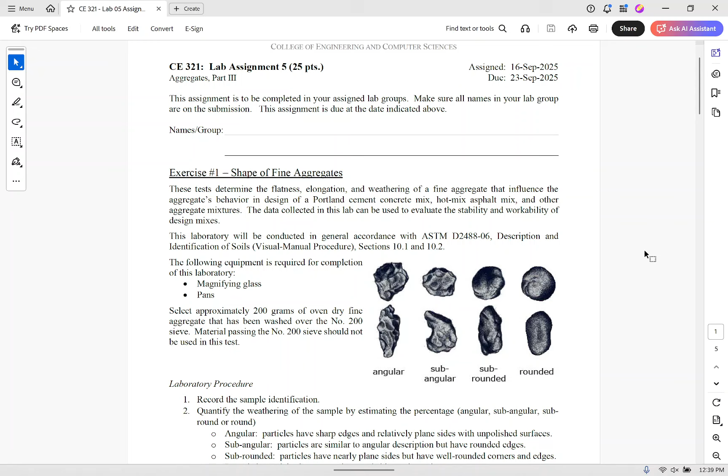Today's lab, we're going to be doing 2 things, and then we'll get into Portland cement and admixtures. One of them is the shape of fine aggregate. If you remember the lab where we had the pile of gravel and had to classify how many were angular, subangular, subrounded, rounded, this is the number of particles that are flat, round, etc. We're doing this for sand, okay?

That's not possible for sand, like, it's not possible to start counting them up. So what you're going to do for each sample is say, for this sample, 20% of it's angular, 30% of it is rounded, 15% of it is subangular, etc. And you're going to do that through visual classification. I'm saying this now because I don't want the class to sit there and try to count every little particle of sand. Please don't do that. You will be here forever. It will make a long lab. Don't do that. This is just a visual classification on the state of the sample that's been given.

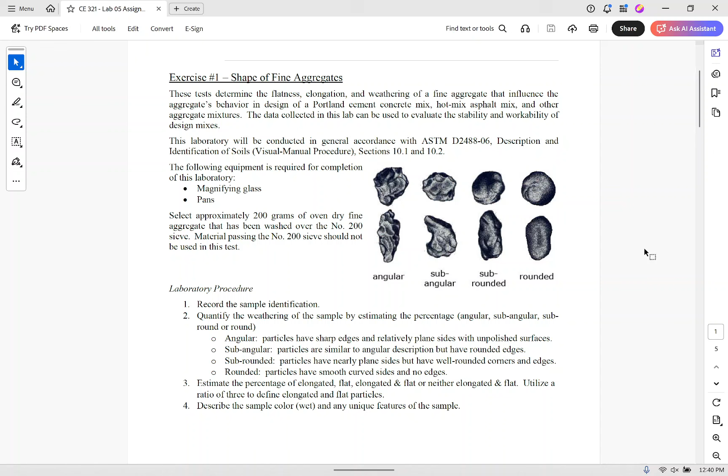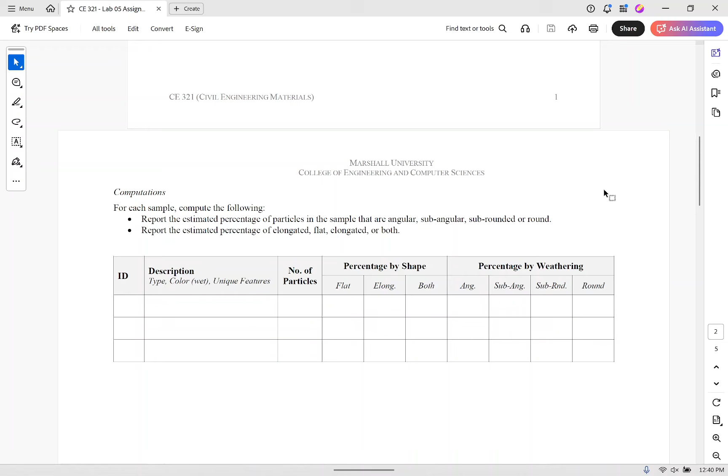We've got 3 samples ready for you for visual classification, not 5. And if I'm correct, I believe one of those samples is going to be somewhat unique. I'm going to keep quiet as to what that is, but I think you'll get a kick out of it as to what the sample actually is. It depends on if Patrick selected that one or not. We talked about it. I think I'll let him make up his mind on that.

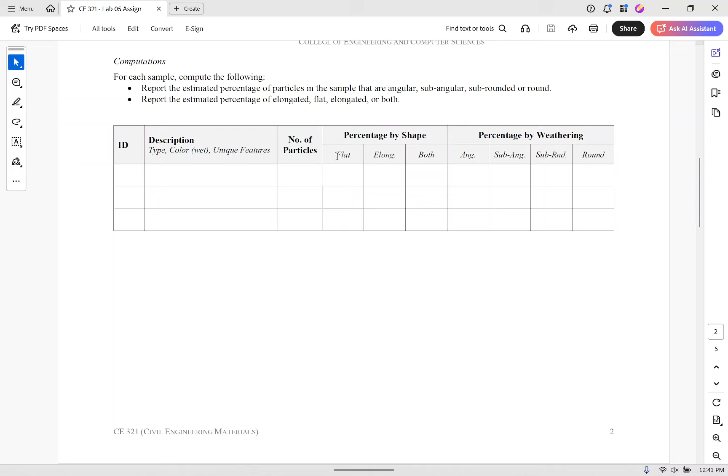Okay, so there's 2 exercises today. One of them is the shape of fine aggregate, which is this. The other is absorption, okay? So if you remember, how does an absorption lab work? Let's talk about the absorption lab that we did for gravel, okay?

For gravel, what we did is we found the moisture content for the gravel at saturated surface dry conditions, right? Now, saturated surface dry conditions are when the surface is dry, but all of the pores are filled with water, right? Is that right? That's what saturated surface dry is. And then we take the weight at the saturated surface dry condition, we take the weight once it's been oven dried, and then we can get the weight of the water over the weight of the solids, and that's our absorption, right? So that's exactly what we're doing here.

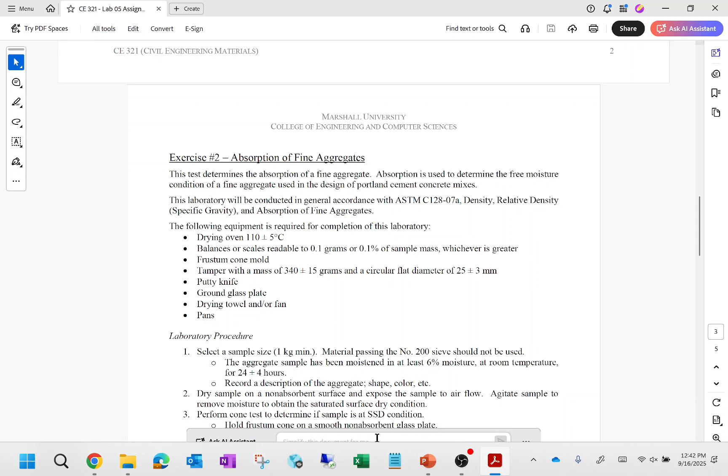The difference is, how do you identify when sand is saturated surface dry? It's a little bit easier for gravel because you can see the surface characteristics. You can't really see the surface characteristics for sand, okay? So the way we're going to do that is we're going to follow a particular ASTM standard involving what's called a cone test, okay? Now I'm going to show you real quickly what that is. Let me pause this.

Okay, so today let's talk about safety real quick. I don't really think there's anything worth noting that we haven't already noted before in another lab, in terms of, like, there's sand, so there's particles in the air, so be careful if you're handling sand with your safety glasses and all that. We don't have anything particularly heavy in this lab.

One thing I will mention is that one of the surfaces we'll use, the non-absorbent surface, is a sort of a pane of glass. It's about yay thick, so just be a little bit careful with that. But other than that, I think it should be a fairly straightforward lab in terms of safety and whatnot.

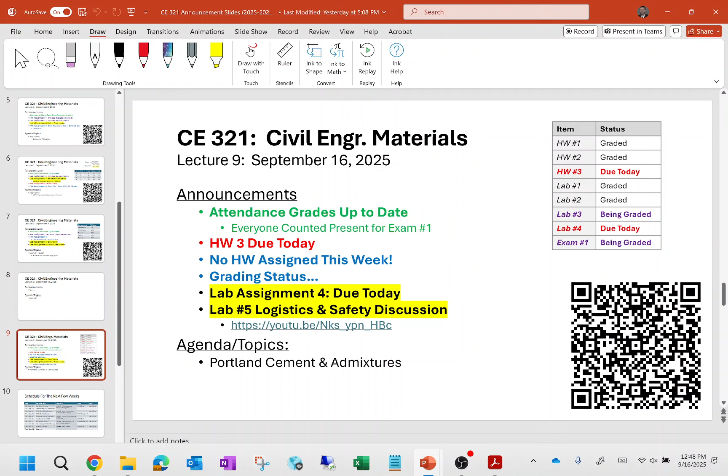Okay, sound good? Okay, so this week what we're going to do is talk about cement, cement and admixtures. So I want to talk about the properties of cement, how to produce cement, some of the reactions. I might touch a little bit on the admixtures, but I'm probably going to try and spend most of my admixture discussion on Thursday, so we can start to ease into Portland cement concrete on Thursday.

Okay, so the first thing I want clear in this room is that cement is not concrete. If you're walking down the road and you're walking on the sidewalk and you trip and fall, you don't hit the cement, you hit the concrete. Cement is an ingredient in concrete. Concrete is a mixture of primarily 4 quantities - well, 3 if you consider it just aggregate - but coarse aggregate, fine aggregate, cement, and water. So aggregate is an ingredient in concrete, water is an ingredient in concrete, cement is an ingredient in concrete. Cement has been in existence for about 200 years.

It was patented in the 1820s, and the name Portland cement comes from the primary ingredient used to first manufacture it, which was limestone that came off the cliffs of the Isle of Portland in England.

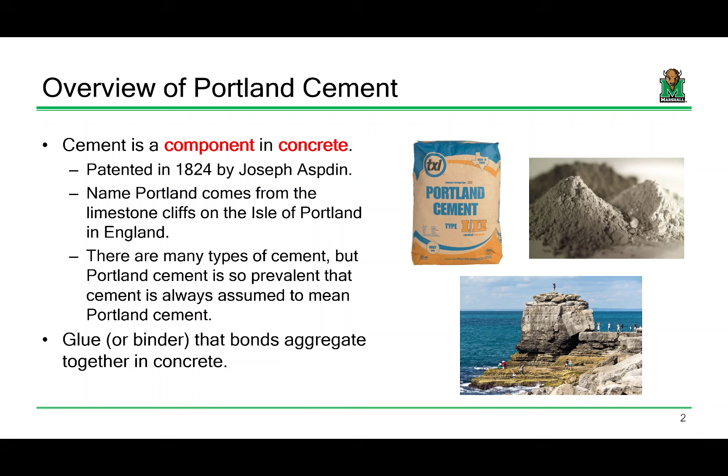A little bit of terminology: concrete is a mixture of gravel, sand, cement, and water. If I take that same mixture and eliminate the gravel, mixing just water, sand, and cement, I get mortar. Mortar is essentially a reduced aggregate concrete, but it's the stuff we put between bricks and masonry units. So that's what mortar is, just concrete without the gravel.

We can make cement paste by just taking cement and water and mixing it together. I'm going to pull up this YouTube video from How It's Made on cement production, because I want you to see that. I didn't do one for aggregates, since that's mostly just crushed up rock, but there's a process in cement production worth pointing out.

In terms of the volume of the mix, we'll do computations including both volumes and weights when we look at our refined mix design process. Portland cement in concrete is probably around 7 to 15% of the mix. The biggest component by volume are the aggregates, which take up anywhere from 60 to 75% of your mix, depending upon your goal.

I'm going to turn it over to the How It's Made folks, because I think they show the process a lot better than I could. So I'm going to pause this and pull that up.

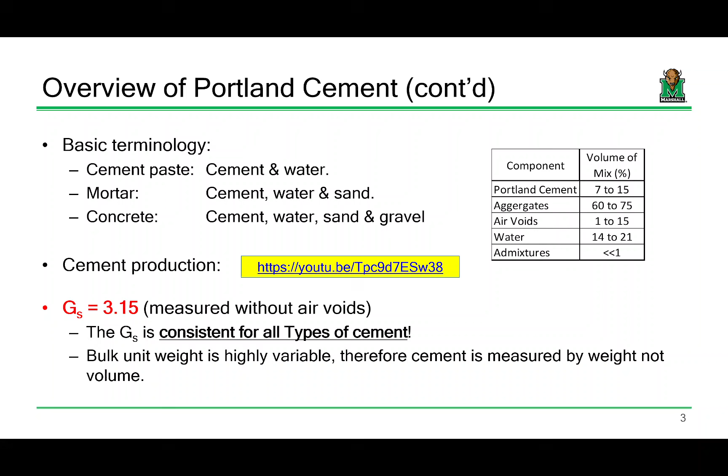I'm going to go through the key aspects of what I think is important for you all as civil engineers. I'll say a little bit about the chemistry, but I don't want to go too far down the rabbit hole on that.

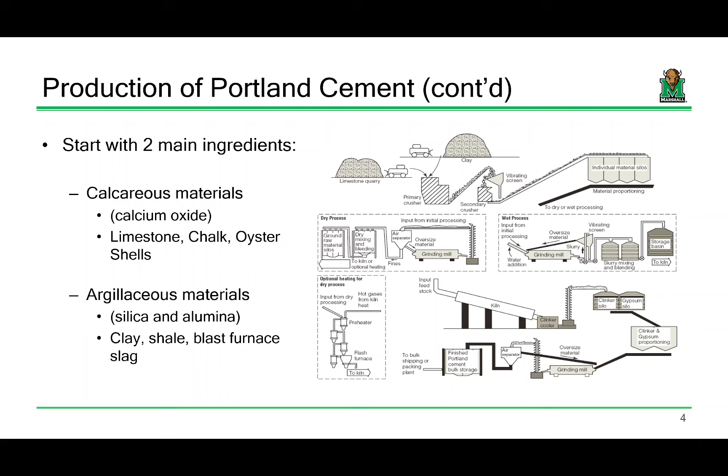It's kind of interesting when you review the process for manufacturing cement. In terms of the manufacturing process, the actual chemistry happens in really just 1 or 2 steps, but there's so much involved in getting the particles to the right size. There's a lot of processing, turning materials into one gradation and then another, producing the clinker, and then grinding it again. There's a lot of QA/QC in getting the particles into the appropriate size, and there are reasons for that.

Now, what are the steps? We basically crush our materials and run them through a grinding mill. We run them through a kiln, which gets really hot, up to around 3,000 degrees Fahrenheit, to produce clinker, and then we grind that clinker with gypsum to produce a fine powder, which is Portland cement.

I think you need to keep cement dry. Cement will draw moisture out from the air, and then it will start to react, which is something we don't want.

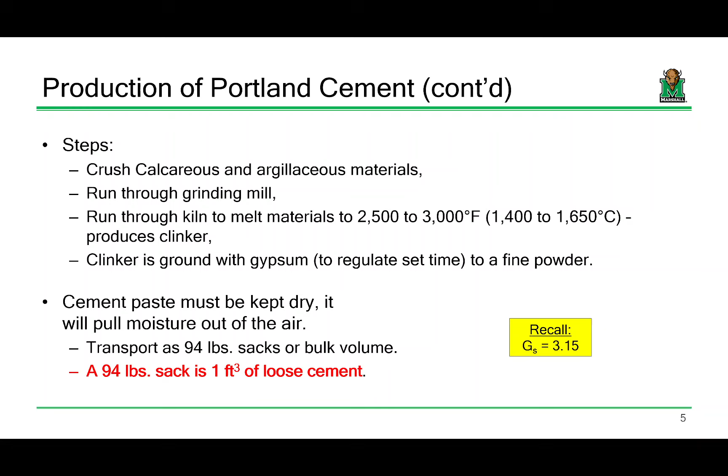We typically transport cement in sacks, and it's sort of a standard weight that a 94-pound sack is about a cubic feet of loose cement. Now it's loose cement, so this ratio doesn't quite go to a specific gravity of 3.15, but the material parameter, we can take 94 pounds for 1 cubic feet pretty standard. Keep in mind this 94-pound sack is also going to have a lot of air in it too, which is why the math's a little different.

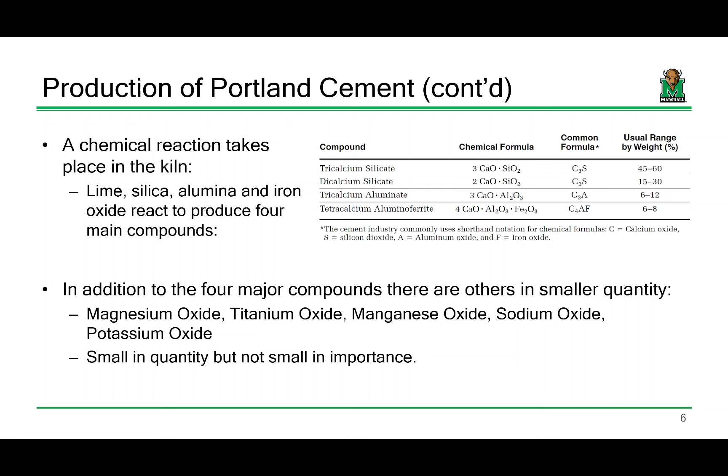I'm going to briefly go through the process. I don't want this to go too far down the rabbit hole into chemistry, but a chemical reaction takes place in the kiln that produces the clinker, and there are several compounds that get generated that are basically combinations of calcium, silicon, oxygen, and some iron and aluminum. These are the four primary compounds generated in the kiln. There are some other compounds produced in smaller quantities, but they can be very important in terms of the overall process in producing concrete.

One thing that hopefully came across in the video we watched on producing cement is that a lot of effort went into generating the powder to a specific fineness. The particle size of cement particles is very important. The reason why is because the finer your particles, the more it controls the rate of hydration.

If I have particle A which is this big, and I have 2 particle Bs which comprise the same weight, well, they have a bigger surface area. The more surface area that the cement can come into contact with the water, the more controlled rate of hydration you get. But on the flip side, you don't want the particles to get too fine, because then they'll react with the water too quickly and the concrete will set faster. So there's a very specific control there.

Your particle diameters for cement are really tiny. Most of the particles, if we were to do the math, would pass the number 325 sieve, so they're pretty tiny particles. Just to give you some numbers to put this in perspective, if you had a kilogram of Portland cement, that's like 7 trillion particles. That's a lot.

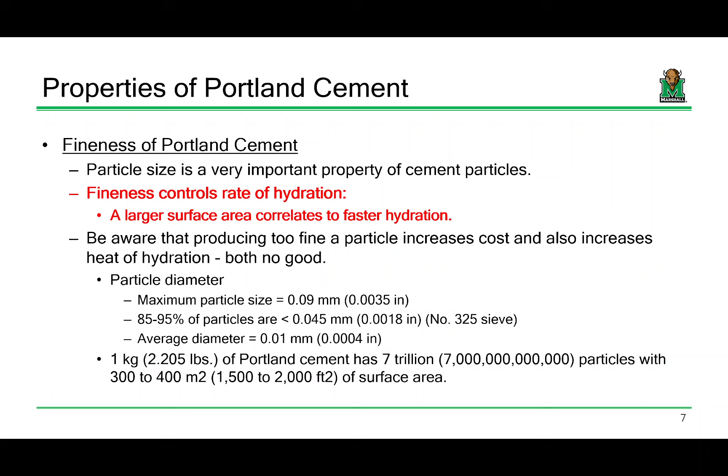How many of you have ever worked with concrete? Have you ever set concrete? It's hot, isn't it? It produces heat, right?

One of the things that you get in a reaction between cement and water is the production of heat. Several chemical reactions occur during cement hydration. For example, what happens when you take tricalcium silicate plus water, or tricalcium aluminate plus water, or gypsum, and so on. But it's the tricalcium aluminate plus the water that's the one that generates the heat.

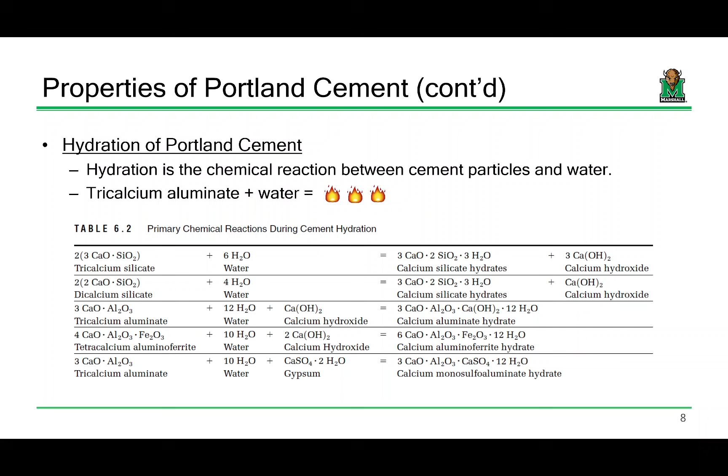That is one of the things we have to watch for whenever we're producing concrete, is controlling that heat generation, especially in production of mass concrete elements, or any elements where what we're casting is really big. Just something as simple as the right cement to use in order to control that heat is pretty important, because if you have uncontrolled or differential heat in your element, you can get defects in it without even having done anything. It's just the heat changes and whatnot.

Let's talk about what happens when you start to react the cement with the water. The development of the solid structure between cement and water begins the moment that water comes into contact with the cement. If you're talking about cement paste, just cement and water, it'll be workable for about 45 minutes, and then it's going to start to solidify. It'll solidify within about 2 to 4 hours, and then it's pretty much not workable.

If you've ever worked with concrete, the moment they start mixing it, you're on a timer. Everybody who's worked with concrete should know that. What happens is those particles start to form bonds, and they form bonds by hydrating. Concrete, or cement, those particles will continue to hydrate and continue to form those bonds.

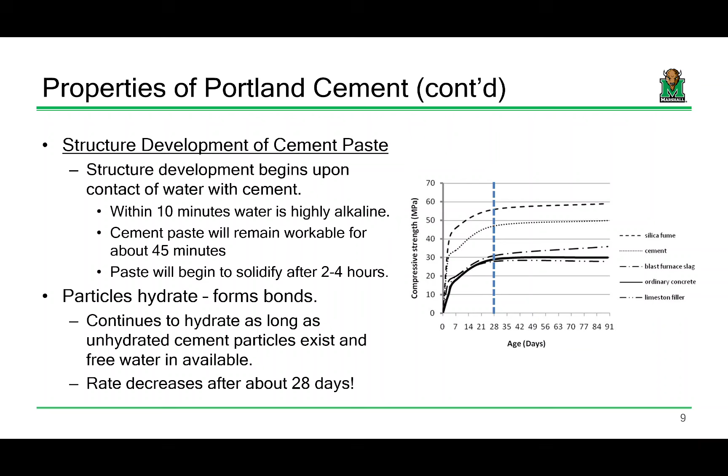Let's talk about the fifth ingredient in concrete, and sometimes it's wanted, sometimes it's not. What do I mean by the fifth ingredient? Well, Dr. Mike, didn't you say there was gravel, sand, cement, and water that goes into concrete? Yeah, there is a fifth ingredient though, and that fifth ingredient is air. Air can be in your mix.

There are a number of reasons for voids in hydrated cement. Some can be on purpose, things like entrained air. Some can be not on purpose - for example, if it was poorly placed or poorly consolidated, that can generate voids. Sometimes you'll get voids just because of the molecular structure of the cement and water reaction. Those voids have very significant impacts on the behavior of concrete. They can affect its strength, its durability, etc.

Now sometimes those voids are desired. How many of you have ever worked on a DOH project, had a summer DOH internship? Did the term air entrainer ever pop up, or air entrained concrete? Anybody ever mention that? You're shaking your head yes. So an air entrained concrete is when we purposefully generate the mix - we insert what's called an air entrainer, and it adds bubbles into the mix. Those bubbles are a good thing. They're by design because they act like a ball bearing.

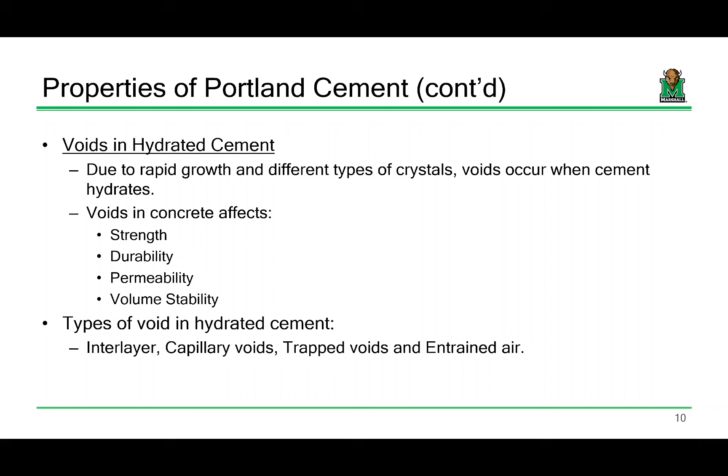What I want to focus on here is that, as a result of this fifth ingredient, air, I will use specific verbiage - either entrapped air or entrained air. Entrained air is by design, that's on purpose, produced by including an admixture - we'll talk about admixtures on Thursday. It's a good thing for concrete, particularly concrete placed in exterior situations or subjected to freeze-thaw cycles.

Entrapped voids - that's not good. Entrapped voids are whoopsies. Those happen when the concrete was handled poorly, placed poorly. It decreases strength, increases permeability, which is really bad for external applications. What do we put on top of the road in February in the great state of West Virginia? Salt. And we don't like that stuff to permeate into the concrete, because if that hits the rebar, it rusts - metal rusts, it expands.

That's no good, so that's a bad thing. So entrapped voids are a bad thing, and entrained air is a good thing. And entrained air, we're talking about microbubbles here.

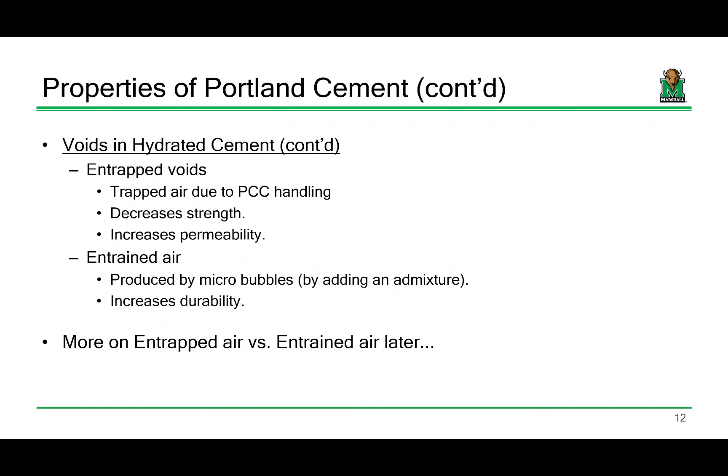A little bit on terminology, and this is the VICAT penetration test that we're going to do in lab next week. If I use the term setting, setting refers to the stiffening of the cement paste, or the transition from what we'd call a plastic state to a solid state. So setting is just it becoming solid, okay?

Hardening is it gaining strength over the life of the use of the element. So the setting of cement paste or concrete happens within a few hours of your mix. Hardening happens over life, okay?

I'm going to very briefly mention this VICAT penetration test. We're going to talk about it a lot more next week, but one of the ways you can measure the stiffness of cement paste is to perform a calibrated penetration test, where you'll have a sample of cement paste or mortar paste in this device with a known force and a known depth of penetration.

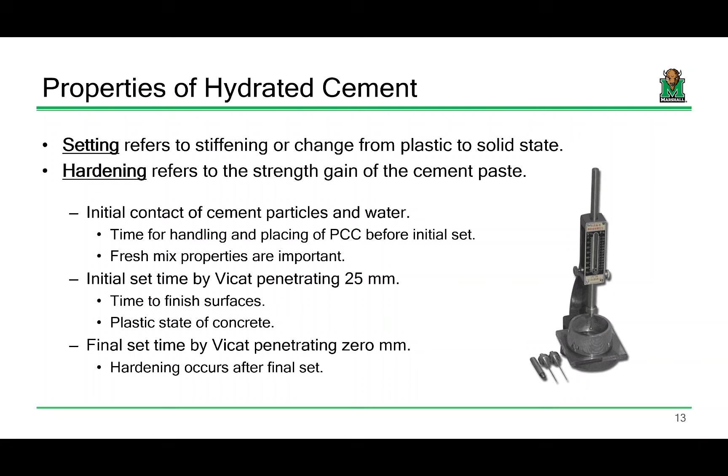You can measure the performance as the cement is setting, right? So you'll perform this test at certain intervals of time, and you can plot that and whatnot. We'll talk about that next week.

We're not going to do a soundness test as a class. Patrick and I will probably, if we have time, try to do a demonstration for you in the lab. But if I ever use the term soundness as it relates to concrete, we're talking about its ability to retain its volume after setting. So how many of you have ever heard of— I'm just curious, somebody's calling me.

That's going to have to be later, I'll have to answer them later.

How many of you have ever heard of pre-stressed concrete? Has that term ever popped up? What is pre-stressed concrete? Well, pre-stressed concrete in a nutshell is what happens.

So let's talk about concrete in general. Concrete is a material that behaves very well in compression, very poorly in tension. So for those of you with a really bad structural analysis professor, concrete would theoretically be great for the members in a truss that are in compression, really bad for the members in tension, okay? The whole notion of reinforced concrete is to put rebar where the tension is, okay?

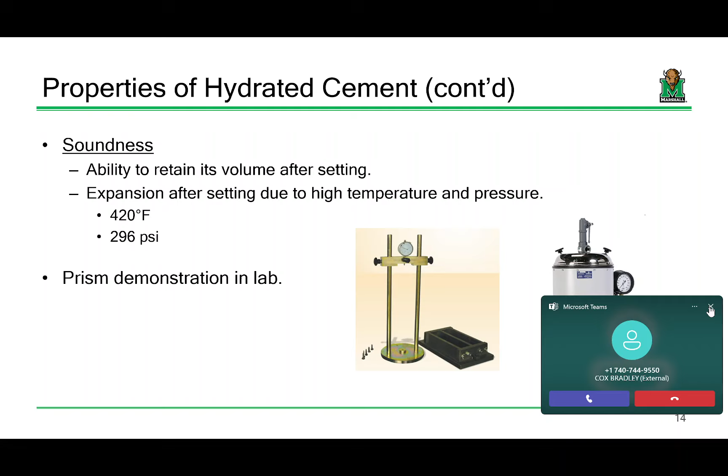Well, with pre-stressed concrete, oh my goodness. Answer it. I'm not answering it. What's that? No, no. Okay, maybe if he calls again I'll answer it. I'll pause the video.

Oh goodness, okay, so let's talk about pre-stressed concrete. So with reinforced concrete, we put rebar where the tension is. But pre-stressed concrete, we take it a little bit of a step further, okay?

So what we basically do is we apply a pre-stress to certain tensile elements in the member, namely pre-stressing steel strands. We stretch them really, really hard. We cast concrete around it, and then we let the tension go.

And what happens is, by letting it go, imagine I had a big rubber band that I stretched. I cast some concrete around it, and I let my hands go. It sucks compression into the member. Does that make sense? Okay.

Now, when we do that, that locks in a compressive force inside the member that can negate some of that tension that you get, and it can make those reinforced concrete beams, if we turn them into pre-stressed beams, handle longer spans. They can handle longer spans, they can be thinner elements, etc.

Now, why do I bring up pre-stressed concrete? Because over time, the amount of force that you get when you lock that force in, that force will dissipate over time. And there are a number of sources that will cause that force to dissipate.

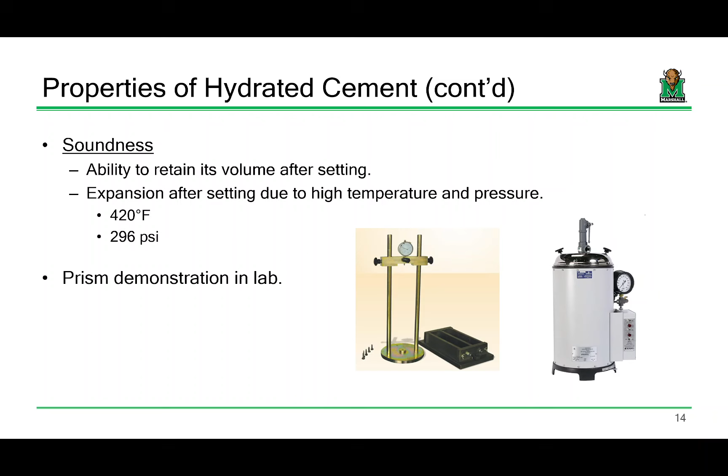You change the volume of the element, you can change that force, and that's what's going on here. It's measuring the ability of concrete to retain its volume after setting. You put it in a big pressure chamber at really high temperatures and pressures. We might demo that for you if we can; if not, that's it.

This is one of the things we're doing next week. In addition to the Vicat, we'll cast some mortar cubes. We have preset molds for everybody. We'll mix up the mortar, cast it, let it cure for 7 days, and break them in the lab. So we get to break something — we'll be doing a lot of breaking in lab this semester.

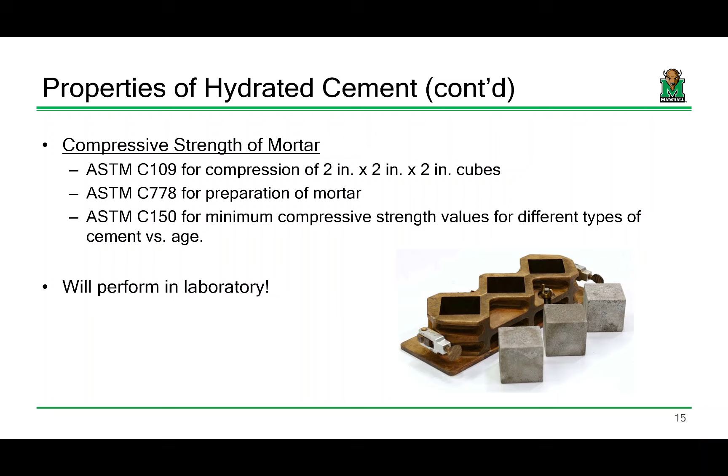Okay, so let's see. We'll talk a little bit about water-cement ratio and its impact, and then we'll probably call it for today. One of the biggest parameters that comes into effect when we do our mix design is the water-cement ratio — the number of pounds of water to associated pounds of cement.

When we compute water-cement ratios, the cement includes any additional cementitious materials we throw in — things like fly ash or microsilica would be accounted for in the water-cement ratio. Typical concrete has a water-cement ratio somewhere between 40% and 70%.

One thing I want to get the message out about: if you're on a job site and do a slump test — we'll talk about that later — it measures the workability of concrete. You fill a cone, tamp the concrete, lift the cone, and the concrete will slump. If the slump is very low, that means you've got a really stiff mix that's difficult to work with.

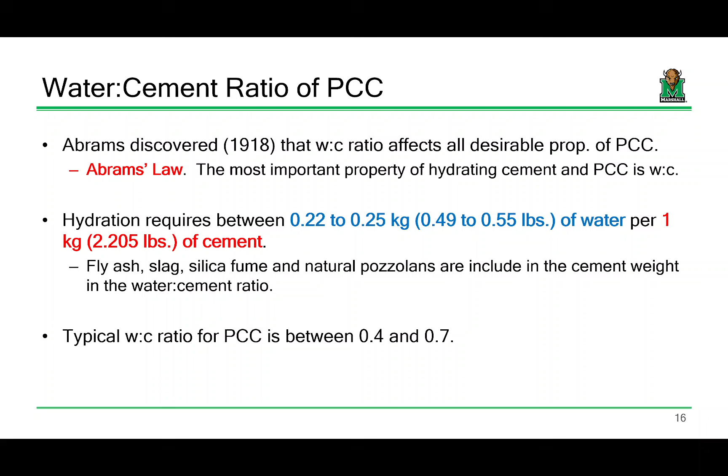It's a common knee-jerk reaction that whenever concrete is too stiff and difficult to work with, people just throw in a little water to make it easier to work with. And yes, it will — I won't knock that. But as you increase the water-cement ratio...

It doesn't matter if you're dealing with air-entrained or non-air-entrained concrete — adding water will cause capillary voids in the cement-water reaction. That decreases the strength of the concrete, decreases its durability, decreases the bond between layers and between concrete and rebar, and increases permeability. It's about the worst thing you could do as a mix designer to fix workability by just throwing water in. It'll be okay — no, okay?

Part of the refined procedure we're going to do is all about correcting for that water, correcting for moisture, and getting the absolute appropriate amount of water for a given application. So just throwing more water in there — don't do that, okay?

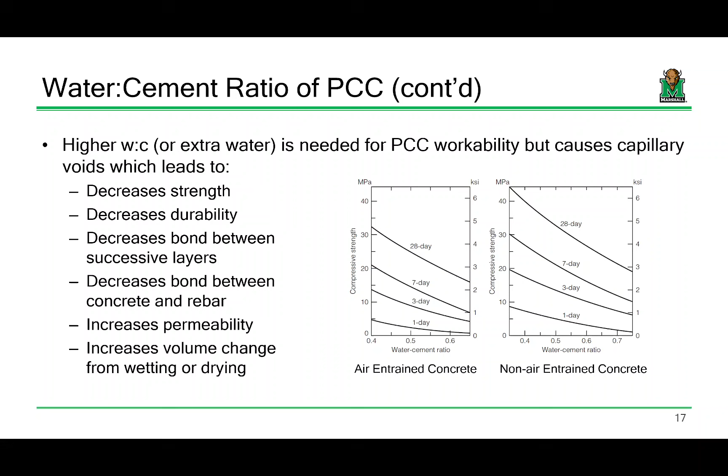We'll probably talk a little bit about types of Portland cement, and then I'll call it for today. Portland cement is the most ubiquitous type we use. We follow ASTM C150 for the production of cement, so when we purchase type 1, type 2, type 3 cement from a supplier, that's referring to this ASTM standard.

There are 5 types of cement we predominantly use — there are others, but these 5 are the star of the show: type 1, type 2, type 3, type 4, type 5. Type 1 is just normal, everyday cement, good for most applications like floors, pavements, and any reinforced concrete structure.

What about type 2? Type 2 is for moderate sulfate resistance, making it a good choice for applications near seawater — things like piers in a bay, retaining walls, or big abutments. Type 3 is starting to get more common — type 3 is high early strength.

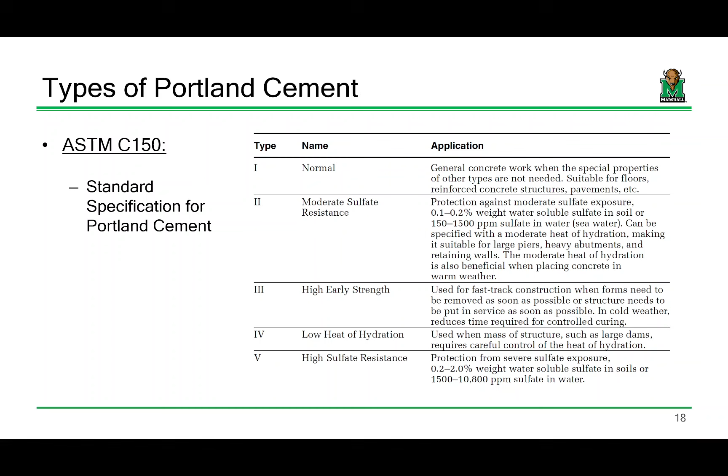We also have type 5, high sulfate resistance, if you've got a lot of sulfate near the water where it's being cast. Type 3 is becoming a lot more common because of things like accelerated bridge construction, and you could also just replace it with a higher value of type 1. Now type 1 is the most common—probably 90+% of any concrete job is going to use type 1 cement, but I'm just throwing this in there for future use.

One thing about cement, and we'll talk about this more on Thursday, is that we often try to include admixtures or supplementary cementitious materials to reduce the need for cement in our mix. A common one is fly ash, which can actually be a little bit of a problem in terms of sourcing it. Where do you get fly ash?

Power plants usually, right? But where does it come from? Usually coal, and the production of steel. But we're melting a lot of old steel now, we're not producing as much new steel. So where do we get fly ash? That's a little bit of a sourcing challenge we're starting to see these days. Just a random tidbit for you all as future engineers—that's a little bit of an interesting problem.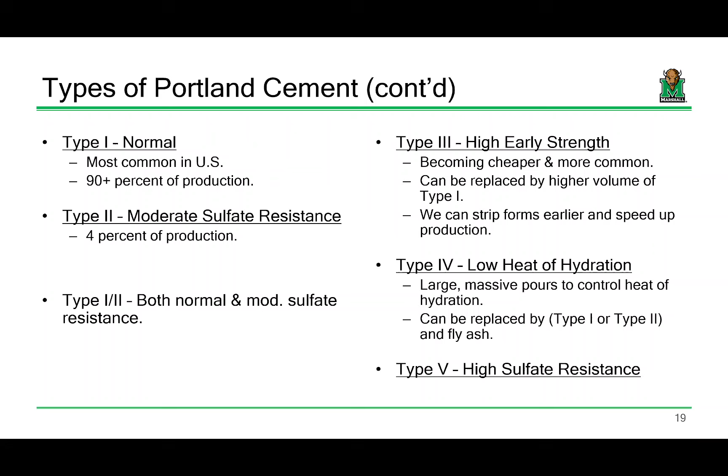Like I said, there's all sorts of other types of Portland cement. I'm not going to get into the weeds on this, just know that you've got your 5 main types, and there are others for other specialized applications.

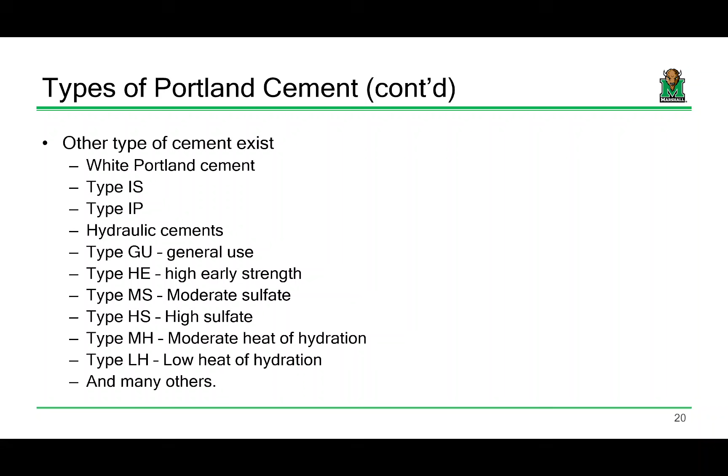One thing I'll say is when it comes to mixing concrete, the water you use is actually pretty loose. Have you ever heard the term potable water? Potable water is pretty much anything that just barely passes the mark for drinkable—it's pretty gross a lot of times, but you can use it for concrete. You can even use seawater for concrete, you just can't use seawater for reinforced concrete because of the reaction with the salt and the rebar. But if you were casting just a driveway or some little pad in your backyard, you could use seawater and it would be fine.

You can actually even use non-potable water as long as whatever's in the water isn't going to affect the concrete. Not really a big deal for most concrete jobs around here, but just something worth mentioning.

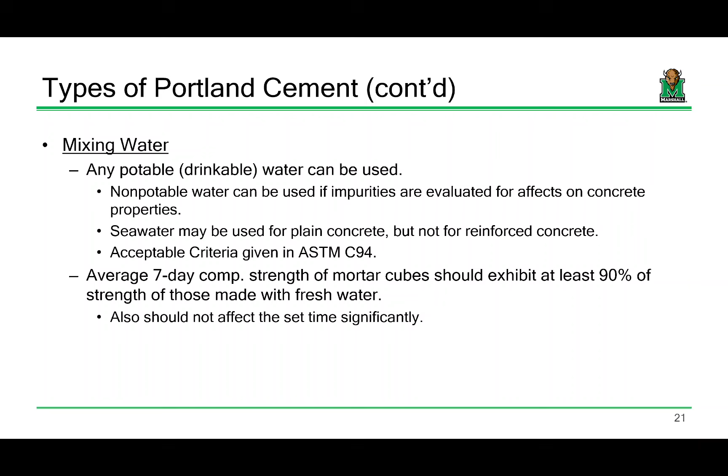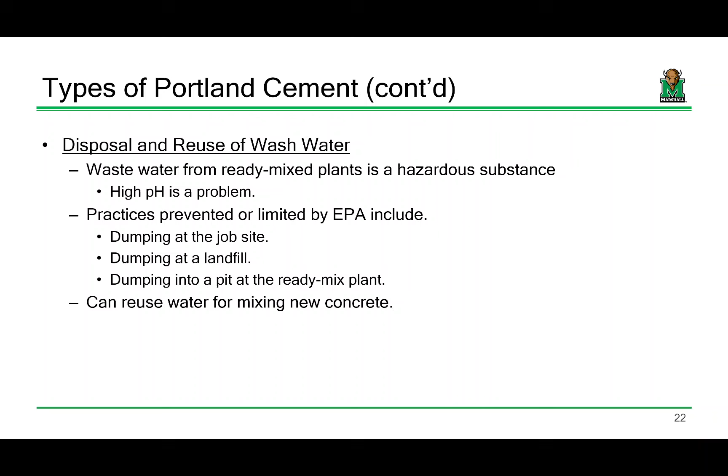The one thing I will say in terms of an environmental issue is that from the ready-mix plant where they're producing cement and concrete, the wash water is actually pretty environmentally hazardous because it's got a ridiculously high pH—it's very alkaline water, and that's not very good. The EPA does have limitations on what you can do with that wash water, so you're prevented from dumping it at a landfill or at a job site. You can reuse that water for mixing new concrete, that's fine, but you can't just dump it. It's a really high pH water, and that's a bit of an issue.